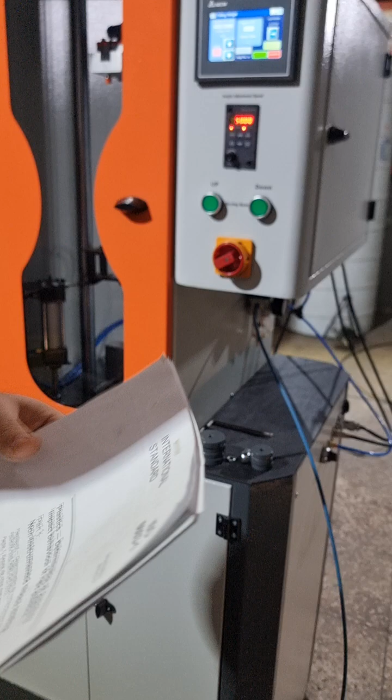I'm presenting the impact tester, a falling weight impact tester for determination of the puncture impact behavior of rigid plastics according to ISO 6603-1. This model is specifically designed with a maximum height of 2 meters.

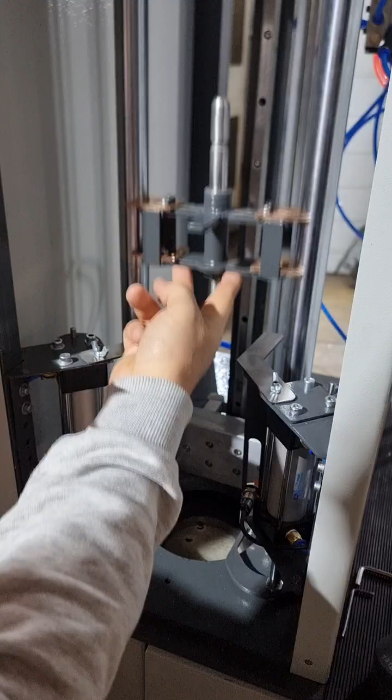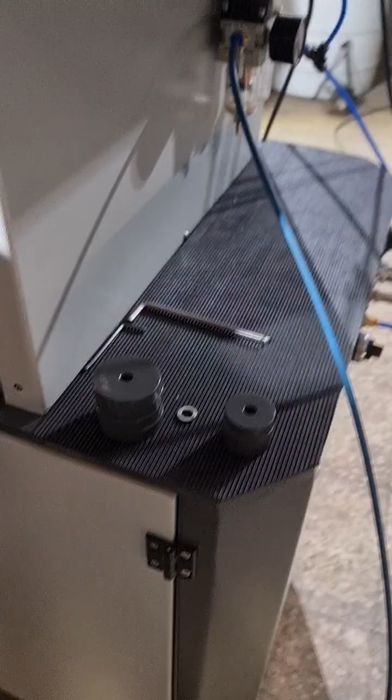With two types of carriers, here you have two types of carrier for small weights and higher weights, and also a set of masses with big diameters, mid-size and small weights. Here are two types of impact striking head, 10 millimeter and 20 millimeter, and you can set any appropriate weight for your samples according to different mass plan as a table.

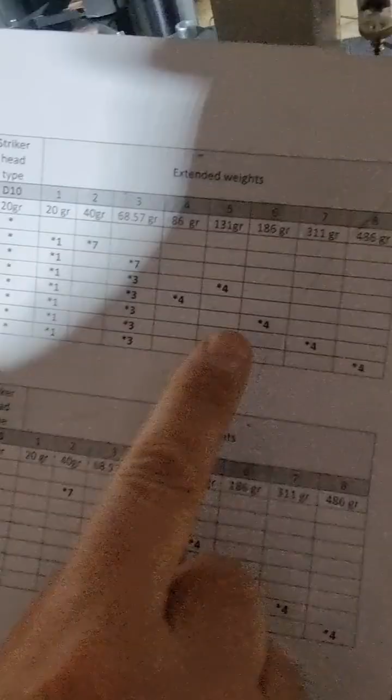You can get different weights of the striking head with different combinations of the weight, carrier and head, and you will have different masses like 500 gram, 800 gram, 1000 gram and so on.

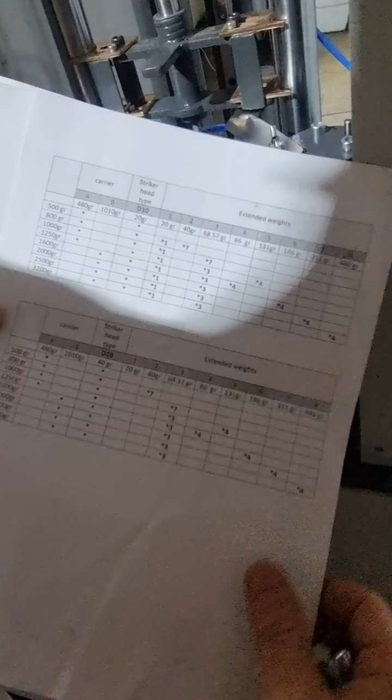This is the table that will be with the machine. You can easily set the proper weight for your samples. Here, to get the requested weight, you always need to use 4 pieces of the bigger weights and 3 pieces of a smaller weight, or in any situation you need to use 7 pieces of masses - smaller, mid-size, or bigger - but be noted that the bigger ones need to be in the upper position, to avoid risk of striking your fingers.

That is for the second impact restrictor/preventer, and it's proper to use the bigger masses in the upper position of the holder of the screw. It's easy to set the requested weight using the combination table. Now I'm using a 20 millimeter hemispherical head according to the standard.

After this you can release the fingers here, bring it down. Before that, put the sample piece here.

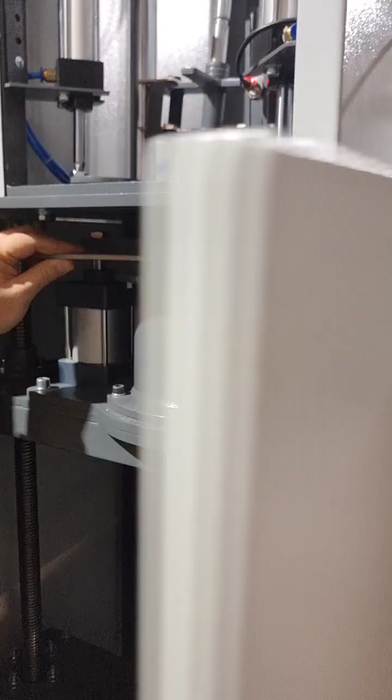You also have a pneumatic gripper for the sample piece. Here you have a valve, and just open it. Here you have the sample piece.

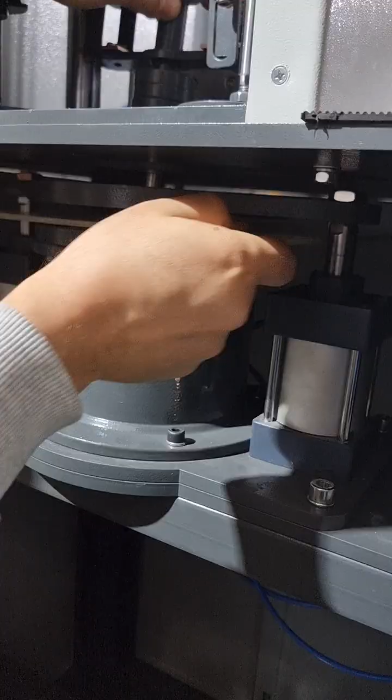This is for demonstration. According to the standard, you have the proper size of the sample piece. I'm just putting it here for the demonstration. You put it like this, then you can grip it.

For having proper distance from the sample piece to the striking head, you need to take a look at the distance between the lower edge of the striker and the finger for the second impact preventer. The proper distance is around 2 or 3 centimeters for the proper application of the second impact preventer.

These pneumatic cylinders are for second impact prevention according to the norm. For the proper use of these preventers, you need to set this distance to about 2 or 3 centimeters. For this you can easily use these 2 keys, up and down, moving the base, moving the sample table.

I'm just bringing it down. The striker is released here, onto the sample piece. I'm just bringing it down here. It's okay.

Here will be the 0 position for me. I need to set the 0 position. I'm just... if I open here...

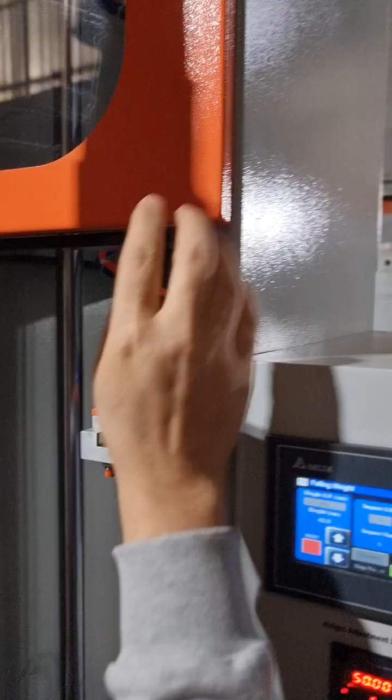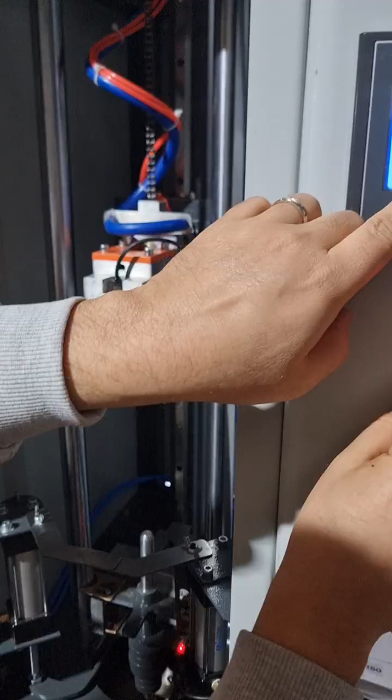Here you have the gripper for the striker, and using these two up and down keys on the touch screen, you can move it upward and downward. I'm bringing it down. Also, using this volume key, you can set the speed of movement - reduce or increase the speed like this.

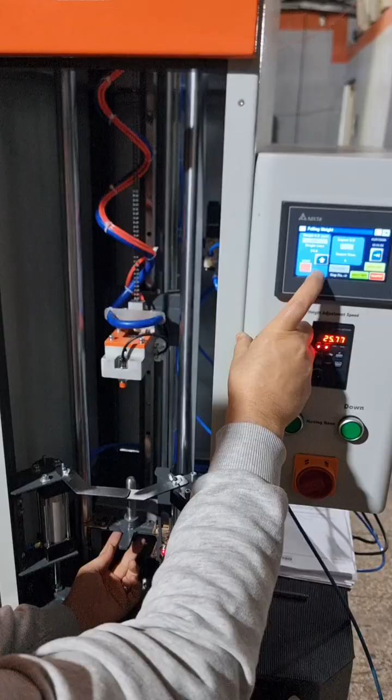First of all, I need to set the 0 position for the gripper. I'm bringing it down. This proximity switch touches this barrier. Slowly bringing it down - yeah, here will be the 0 position for our weight. I'm setting the 0 position here by pressing the reset button.

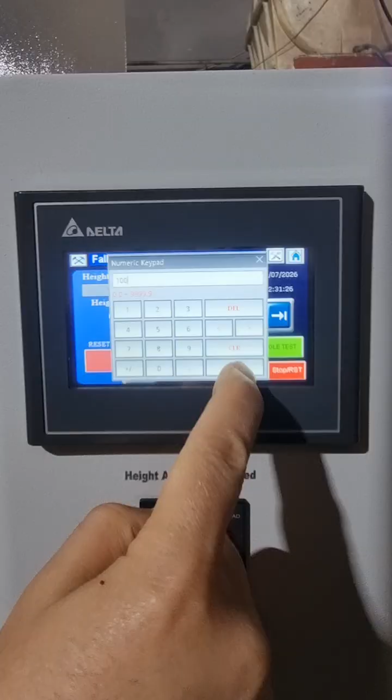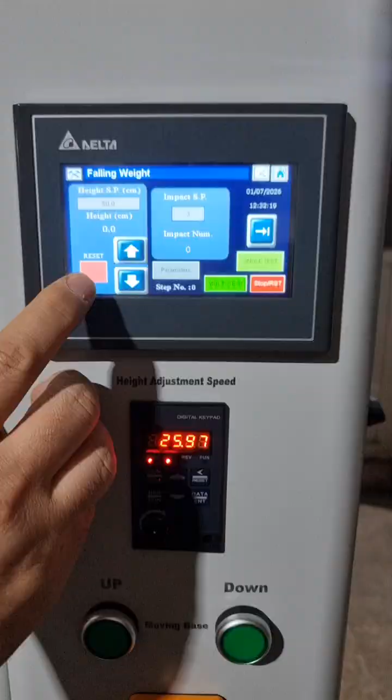Then I want to use an impact distance of 100 centimeters. For this sample piece, let me set the distance to 50 centimeters. For this specific sample, after the gripper for the striker - the proximity switch touches this barrier on the striker - I press the reset button and also set the height of impact to 50 centimeters.

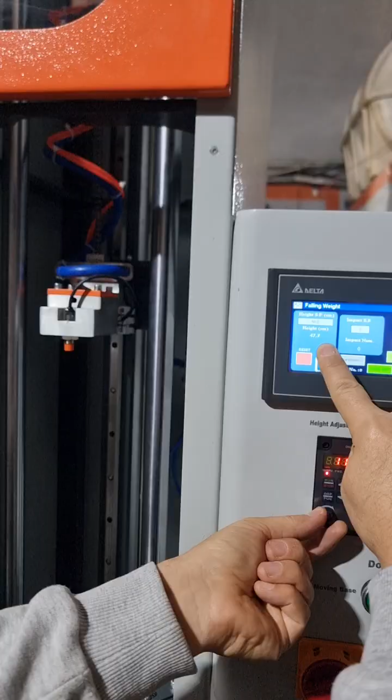Then we'll move the gripper upward to set it to 50 centimeters. I'm reducing the speed to have fine adjustment of the height. Now it's 50 centimeters.

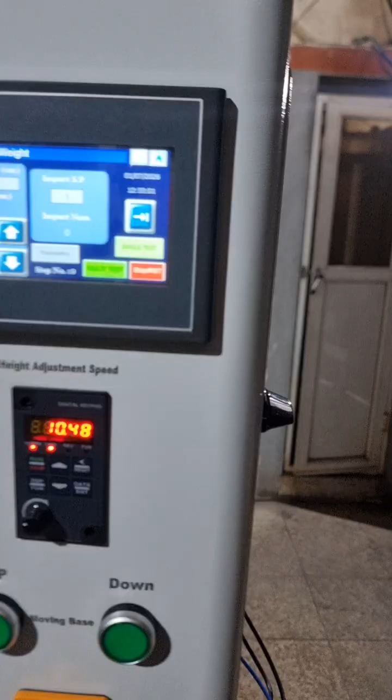Then we have cyclic impact setting, multi-impact test. This is if we want to test according to this ISO norm - this is multi-impact, while this is only a single test. I mean, only one time the striker will hit the sample piece, and that will be enough. Then we will go to the next level of height.

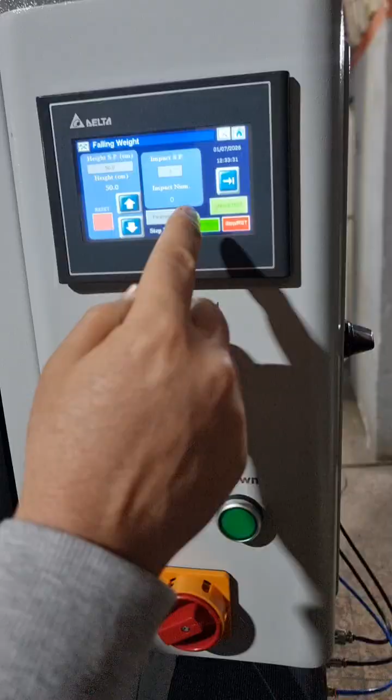In some cases, for example in staircase testing of the impact test of UPVC pipes, you will need multi-impact testing. For multi-impact testing, you have an impact set point here, that is the number of automatic impacts on the sample piece. As I said, per this ISO norm, we will have only a single test.

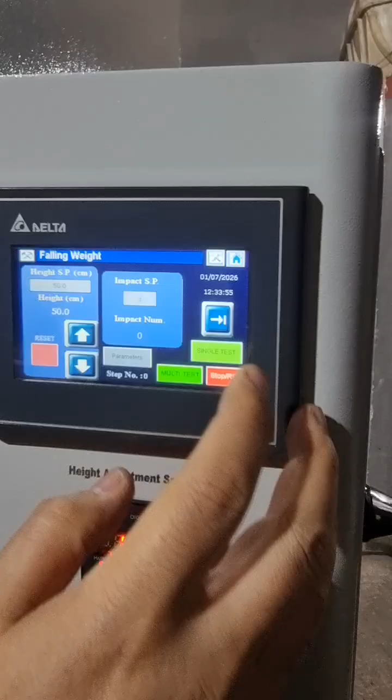Okay, now we are ready to do the test. I'm just clicking on single test.

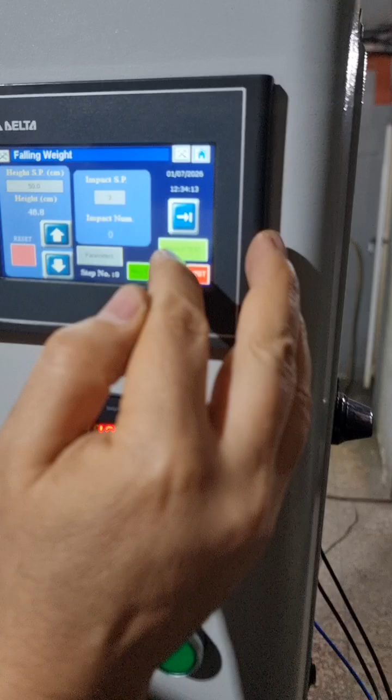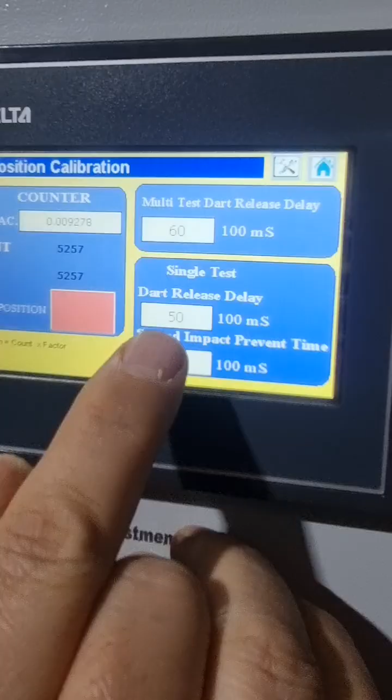Here on the setting page, we have settings for these times. As you saw, after the striker goes into the gripper, we have a definite time for the release of the striker. If we're on single test, this is the dart release delay time, in terms of 100 milliseconds. If I set it to 50, it means 5,000 milliseconds, that is 5 seconds after the striker goes into the gripper, after which it will be released automatically.

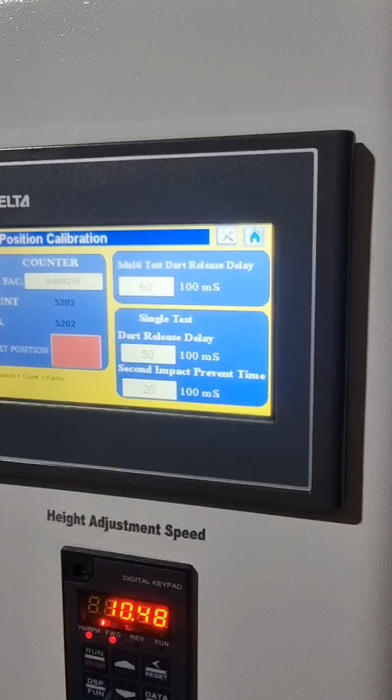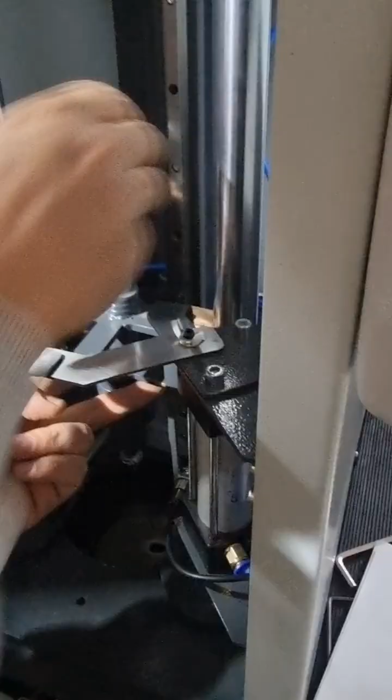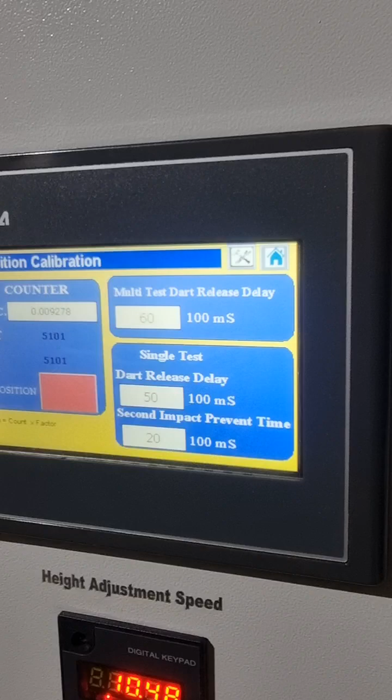Also, the second impact prevent time on single test is the time after the first impact is done on the sample piece, after which the striker will rebound from the sample piece. For the second impact prevention, these pneumatic cylinders will start working, as well as the other cylinder in the back side, for a definite time, only 2 seconds, or you can set it to 1 second. If you set it to 10, that means 1000 milliseconds, or 1 second, it will come up and then go to the 0 position again slowly. That is for prevention of the second impact from the bounce of the striker off the sample piece.

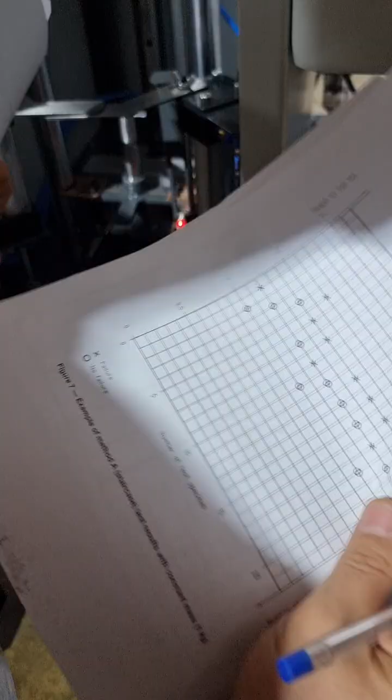Here the testing is easy. If you want to do it according to this norm, we will have 10 pieces of sample for defining the starting weight of the testing. You will have 10 samples only for definition of the starting position. The starting mass of the striker will be defined using these 10 sample pieces. We will set this weight such that 50% of those samples for defining starting mass will be failed, and that will be the starting mass for the start of the process of testing 20 pieces.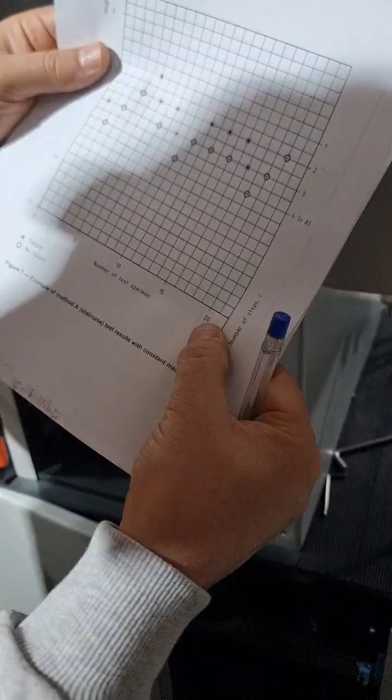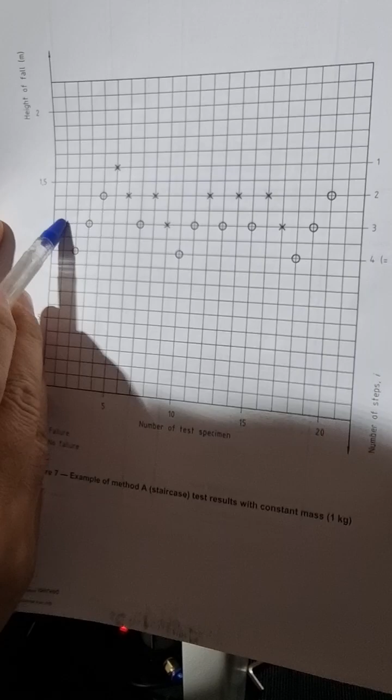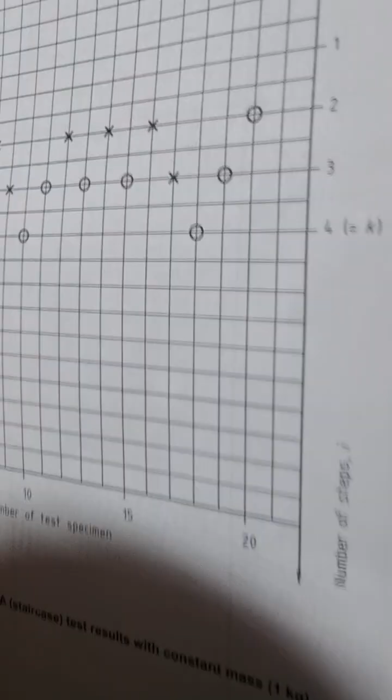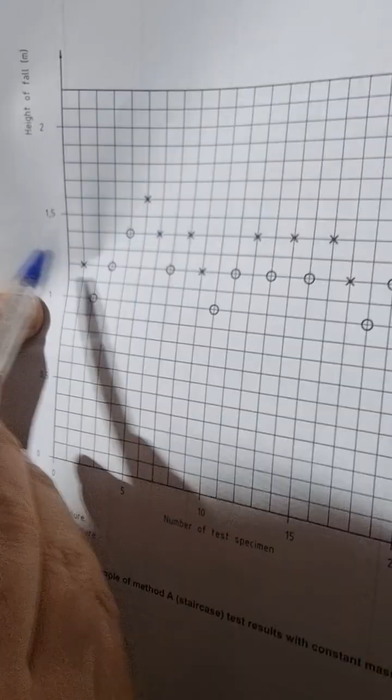After we define the starting mass, for this case as per the standard sample, the starting height is 1.2 meter. Then we hit the sample piece and it will be failed. This marking is for failure, and the O mark is no failure. After the sample fails, we go to the next step with a definite step lower than the starting mass, reducing the mass, reducing the height of impact here on this setup. After the sample is not failed, we increase the weight for the sample to be failed. After the failure is done, we reduce the weight again, and we do this process up to 20 pieces of samples, and we get data like this.

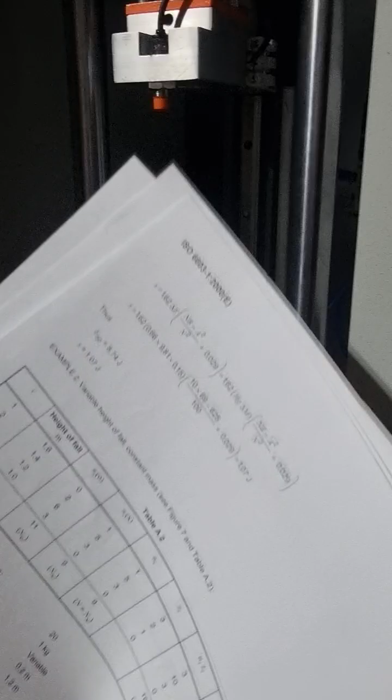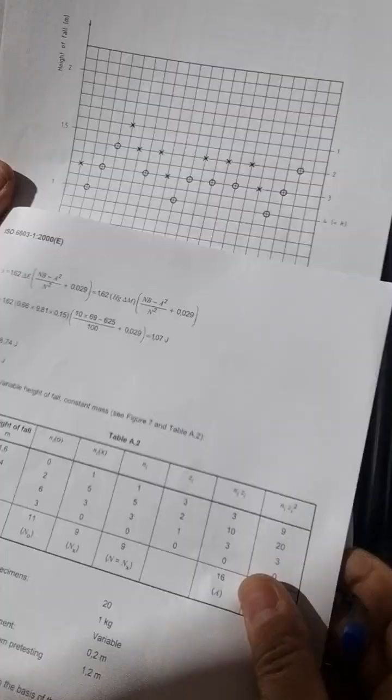This graph shows the height of fall. We will have a minimum height of fall, and this information will be gathered from this table. You see that we have a height of fall of 1 meter. On 1 meter, the number of non-failures is 3, and the number of failures is 0.

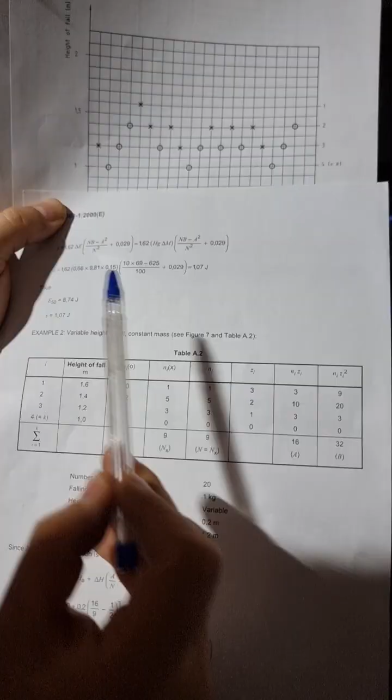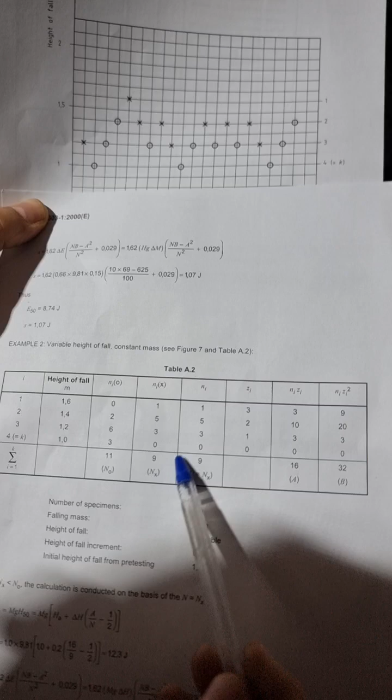For the second step, that is 1.2 meter, non-failures is 6. We count the non-failures on this row, and the failures also are counted here, that is 3. We do this process to calculate the total value of non-failures and failures. Then according to which one is lower than the other, we choose that Ni, the lower value. In this case, the summation of the failures is 9, and here we have 11, so we choose the failure column as Ni.

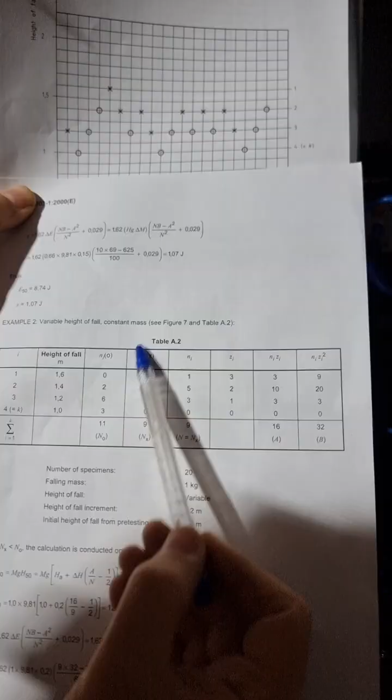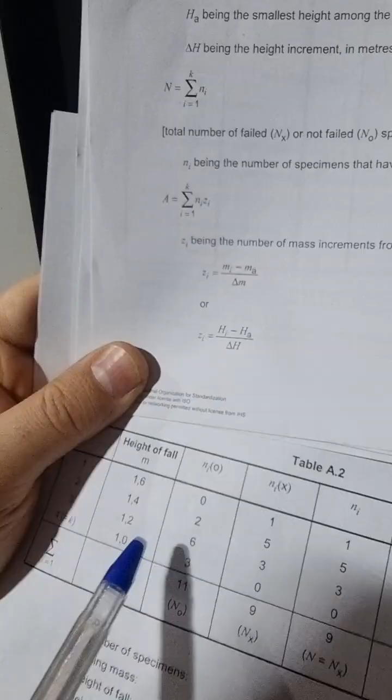The Zi is calculated according to the formula, that is H for each row. On this table we also have Z values, calculated as the height for each row minus the minimum height, which in this case is 1. Delta H is the increment of the height, which in this case is 0.2 meter. In every step we increase or reduce the height by 20 centimeters, that is 0.2 meter.

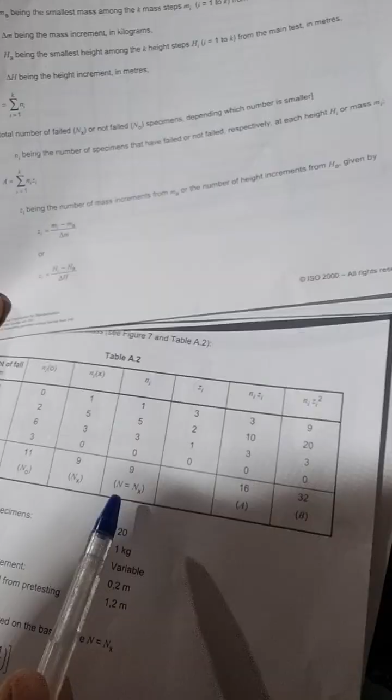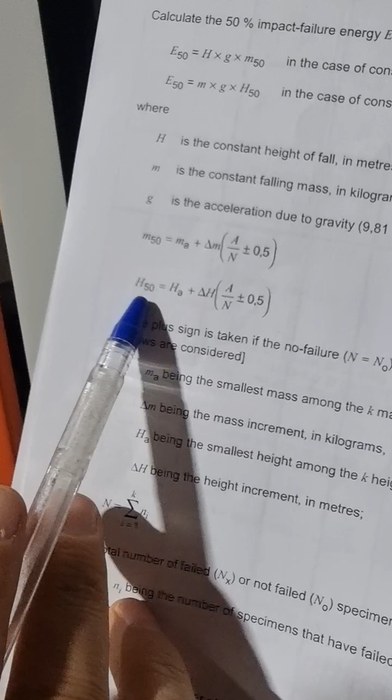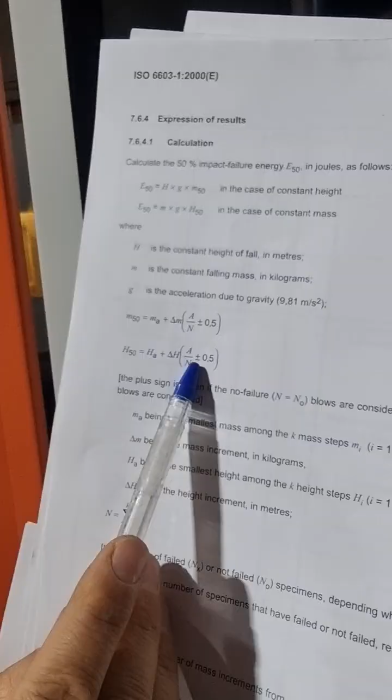The Zi will be calculated, then Ni multiplied by Zi will be calculated here. The summation is A, and N is the summation of the Ni. Then we have everything for the formula here, H50, which will be calculated according to this formula. HA is the minimum, delta H is the height increment, N is the summation of the Ni. According to the situation, we choose which one is Ni, whether Nix or NIO. We also have a point that is plus or minus; according to which one is chosen for Ni, this formula will have a plus or minus sign.

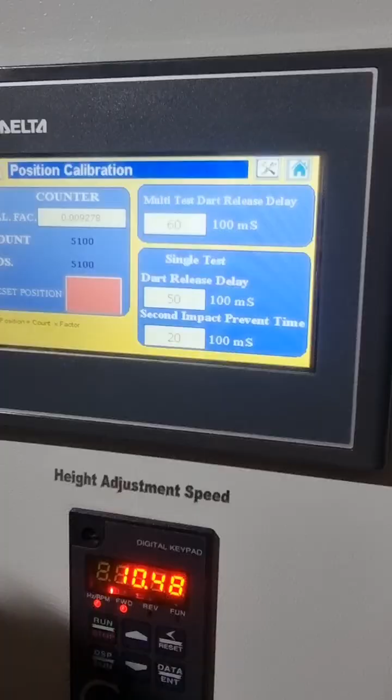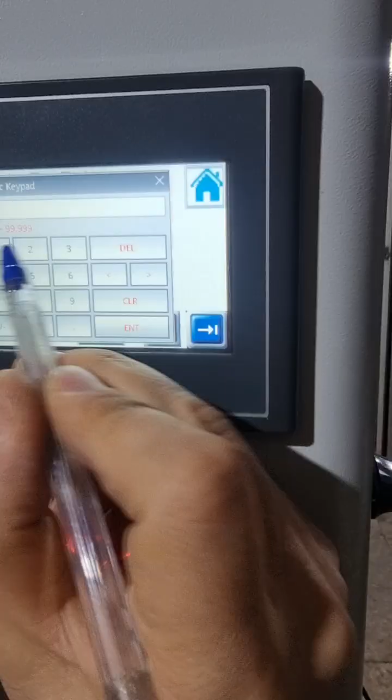Here we have everything for the calculation. In this case we can do the test. Starting by going to the table here, first I'm setting the starting weight, that is 1 kg. Then I'm defining the increment, that is 0.2. Then I calculate the height plan. The starting height is 1 meter here, and the other height values will be calculated according to this increment. I'm resetting here to have the row table to input the values.

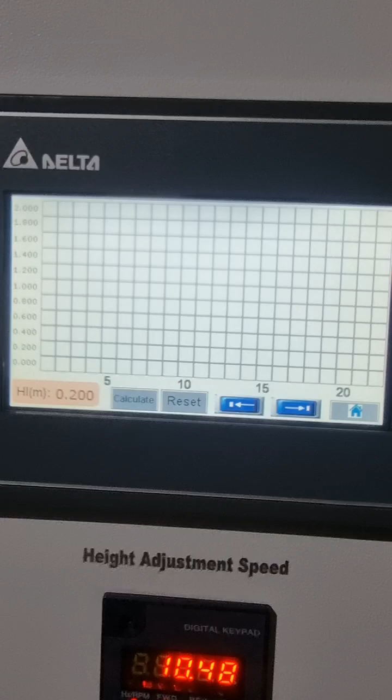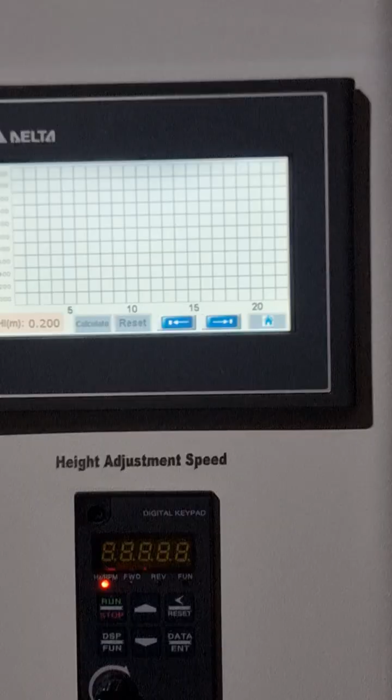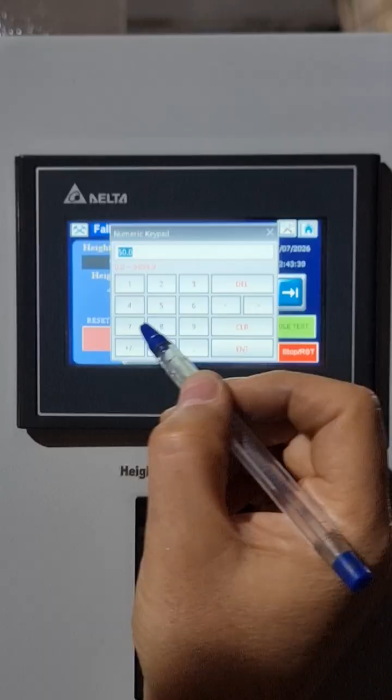For demonstration, I'm choosing the values of the standard sample piece that I showed. I want to do this test setup according to the standard sample. The starting value is 1.2. I will start with the height of 1.2. On this sample piece it will fail, but I want to show you the setup. I will come here and set the height to 120 centimeters, then go up to have the position at 120 millimeters, 120 centimeters, for the starting height.

Okay, we have the starting height. Then I'm coming back to the table. I will do the test on the sample using single test. On this test I'm sure that it will fail, but I will show how to do the procedure.

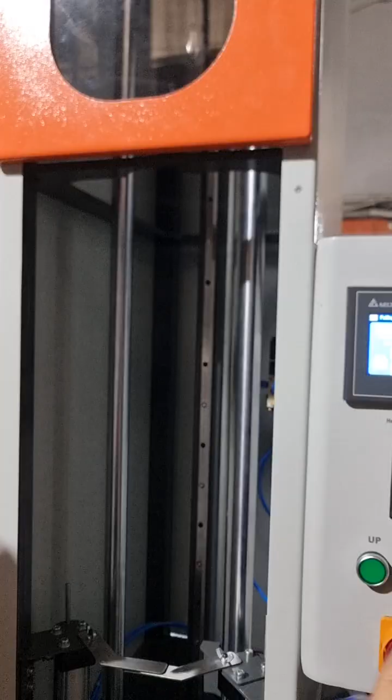We have no failure here. I'm coming here to fill the table. We have 1.2 meter, and I'm just filling the table according to the norm. Here we have no failure, but I'm setting it as failure. If I click one time, it will be fail. If I click 2 times, that is a circle, it is no failure. And if I click one more time, you will have empty, and that is nothing.

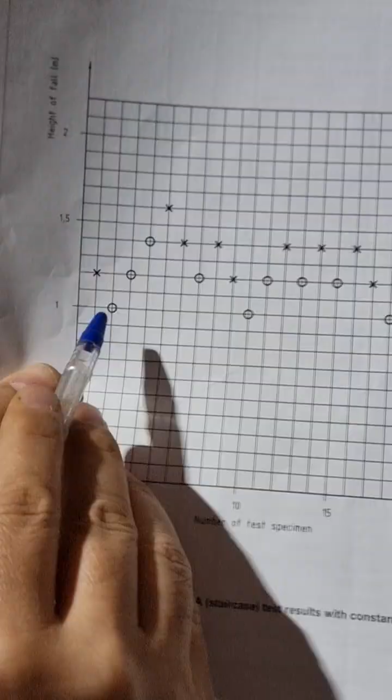Here we have a failure 1 time. Then we will reduce 1 step in the height, that is 1 meter. I will come back here to reduce the height to 100 centimeter. Then I'm coming back here to 1 meter. We have 1 meter. We will do the test, and it says no failure. I mean, click 2 times, that is the no failure sign. Then you will fill the data here.

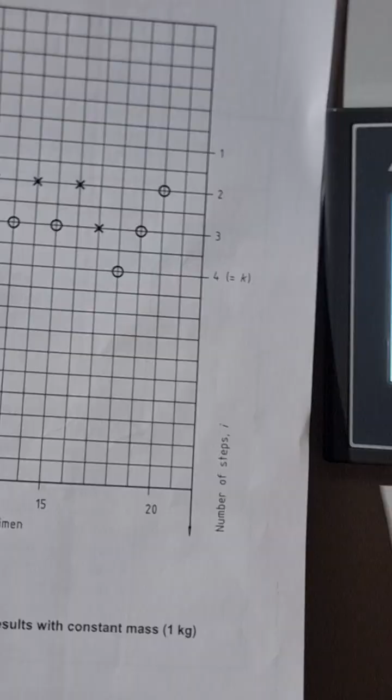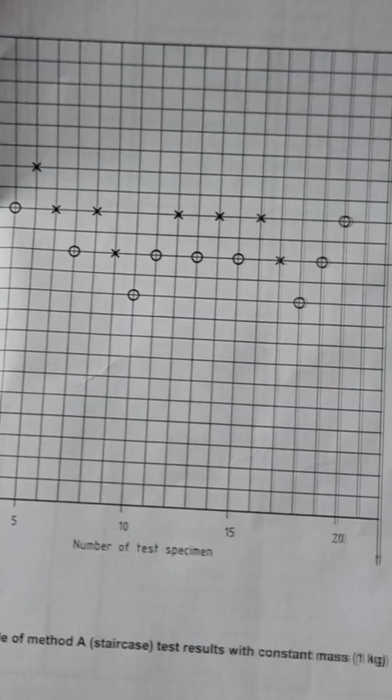No failure. Then next step is no failure, failure, failure, no failure, failure, failure, no failure, no failure, fail, no failure, fail, no failure, fail, no fail, fail, and here also fail, and no fail here, no fail, no fail. After finishing the 20 samples, we will come here to see the calculation. We have the table here, as I showed you.

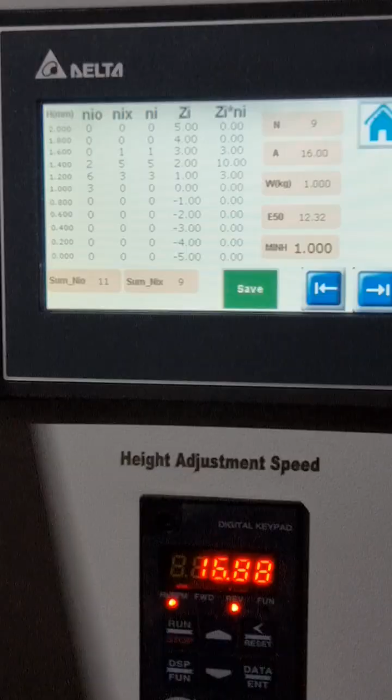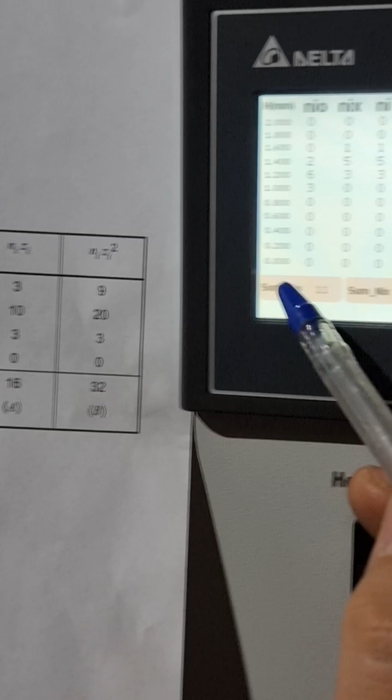After filling the data for the table, it will calculate the values according to the norm. No failures is in the first column, failures is on the right column. The sum of these no failures and failures is here. Because the failure column summation is less than the no failure column, here we have 11, here we have 9, the failure column will be chosen for the NI value. ZI is calculated according to the formula, and NI ZI multiply is here in this column. And the energy will be calculated here according to the test data.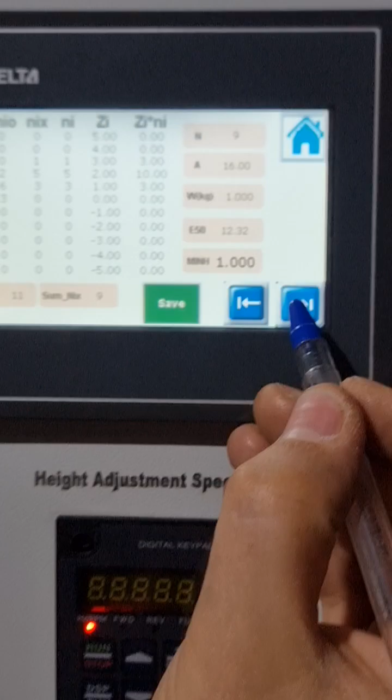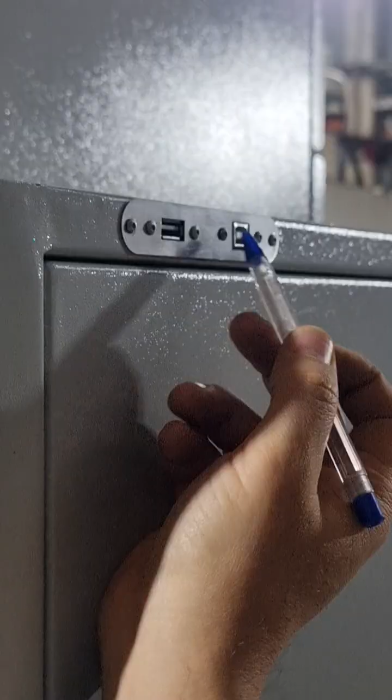After the testing is done, you can save the data here. It will save the data up to 2000 sample pieces. It will include the time, date, sample size, wall thickness, sample information, customer, everything will be filled here. We have 2 USB connections. This one is for firmware update of the software of the screen, and the second one is for the flash disk, saving the data as a Microsoft Excel file to the flash disk.

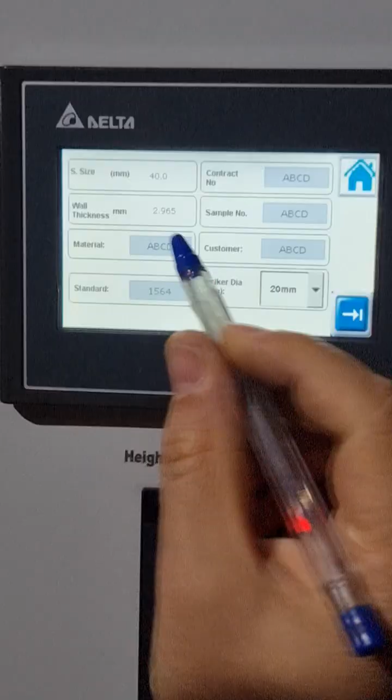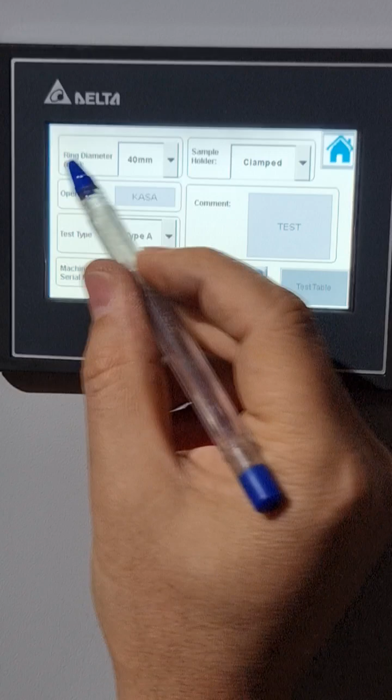For the general parameters of the samples, you can come here, parameters, and fill the data here. You have two types of striker head, 10 millimeter or 20 millimeter. The second page. Also you have two types of ring diameter. Ring diameter is here, that is a gripper for the sample piece. Also according to the norm, you can choose two test methods, clamped or unclamped. You can put the sample piece here with no clamp, or with clamp, but the test results will be different as the standard says.

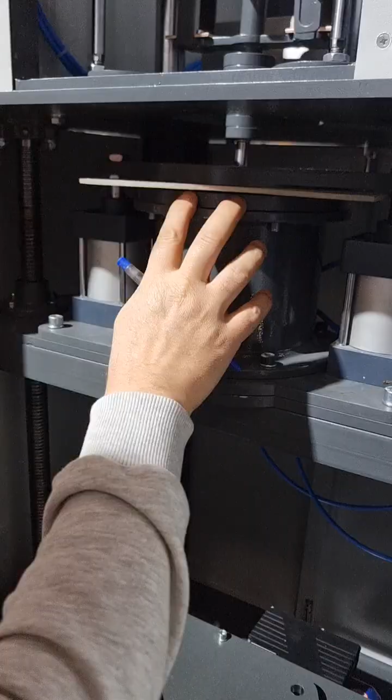You can easily change the clamp here. You have two types of clamp size for the sample according to standard. You can easily open these nuts here and open these screws and change the base and also the upper clamp for the sample piece, if you choose other sizes according to the standard.

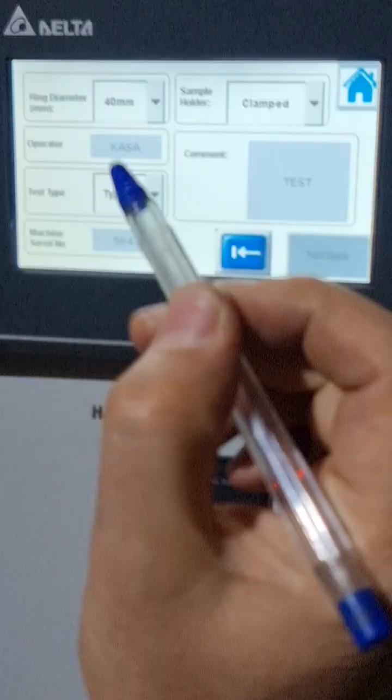Here we have selection of the clamp or unclamp sample holder. Here we have a ring diameter of 40 millimeter or 100 millimeter. This model is 40 millimeter. The other one that is already installed is 100 millimeter. We also have type A and type B. You can select it here. These two pages are for the sample parameter setting. We also have access to the test table here. Here we have the setting page, setting of the height, and nothing more. Everything is clear here.

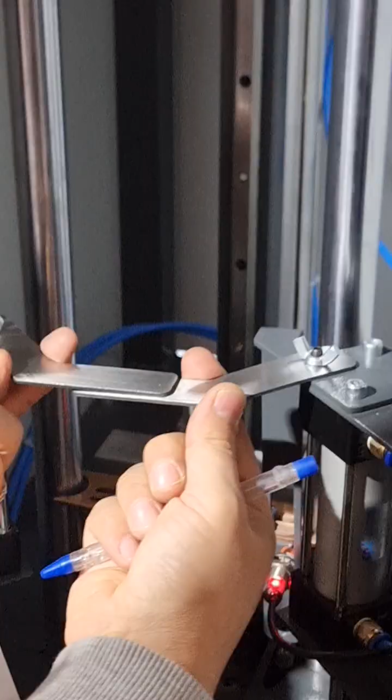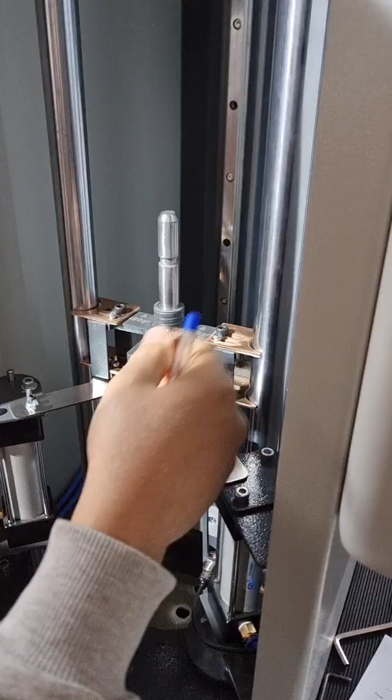We also have fingers here. If you want to change the striker, you will bring it up. Bring the stopper fingers here. Then you can loosen these screws, loosen these brass slides, and you can release it from the position here between two columns, and then replace it. That's all. Nothing more, I think.

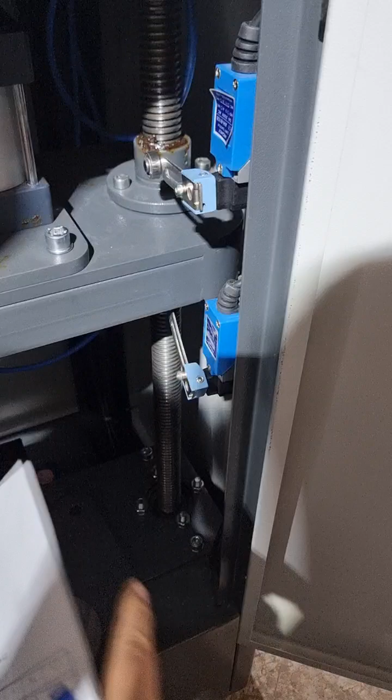Here also we have limit switches for the movement of the table. Whenever I'm coming down, for example, the lower switch will be activated, and this is the maximum position of the movement for the table. In case of need, you can change the position of these limit switches as well. Here you have screws. You can loosen those screws for the holders of the switches and bring it down.

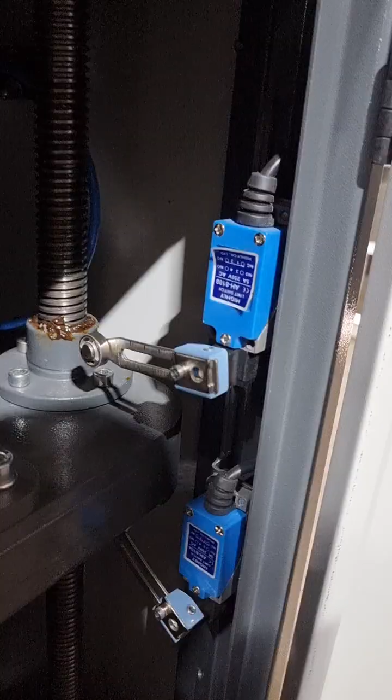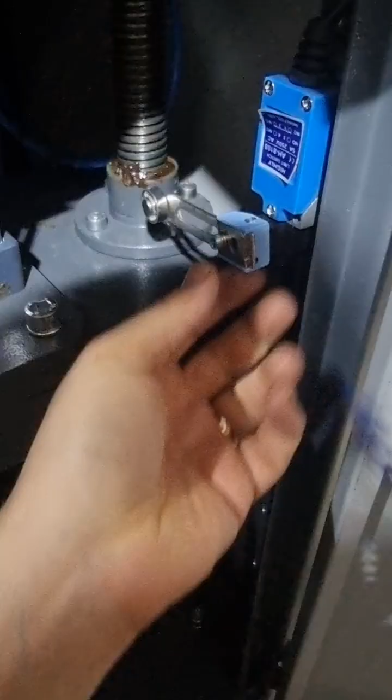Or if the modification of this position is low, you can easily loosen this screw and change the angle of this finger. Just loosen this screw, then rotate the finger like this. If you loosen this screw, then you will change the angle. Then the maximum travel of the plate will be changed according to the new setting of the finger for the limit switches.

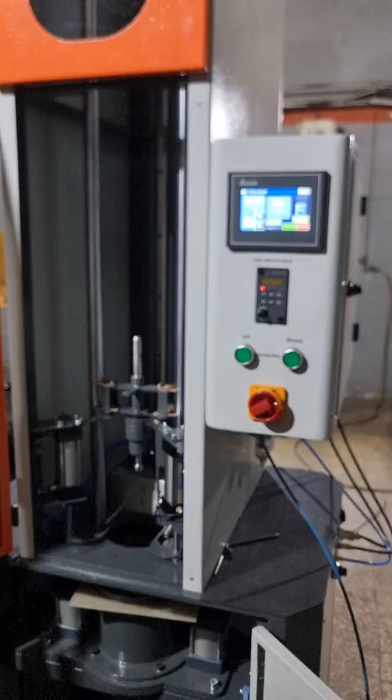Everything is clear. Thank you for choosing the impact tester from AHP Plastik Makina. This one is specifically a puncture impact test, non-instrumented puncture impact test according to ISO norm. Thank you.